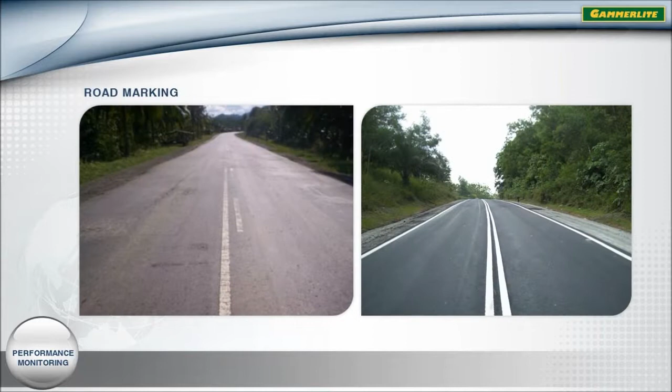The performance monitoring process in a sustainable road asset management involves measurement of specific indicators to identify the current level of service of assets and its capability. If a deficiency in level of service is recognized compared with the desirable level of service, interventions would be required to bridge the gap. This process is predominantly applicable to road assets, for example, road pavement, traffic signage, and road marking. These assets have lifespan and are subject to deterioration due to aging, traffic loading, climatic and environmental factors.

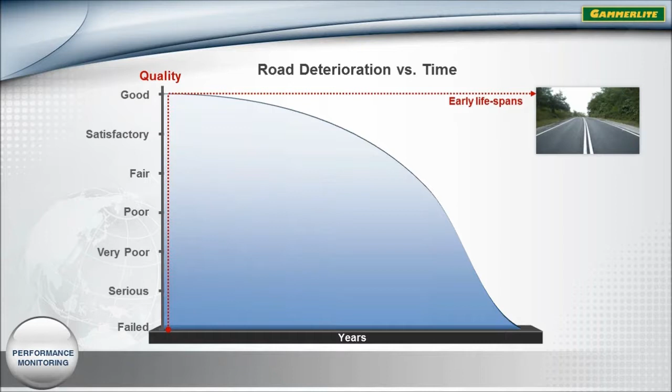Road pavement is one of the examples of road asset which will deteriorate in time under traffic loading and climate. One of the most common pavement condition indicators perceivable by road users is known as roughness, expressed in the International Roughness Index, IRI. New constructed asphalt pavement generally gives low IRI values, which indicate a good riding quality. However, as aging process continues and under change in traffic conditions, the roughness of the pavement increases, reflecting a decline in riding quality.

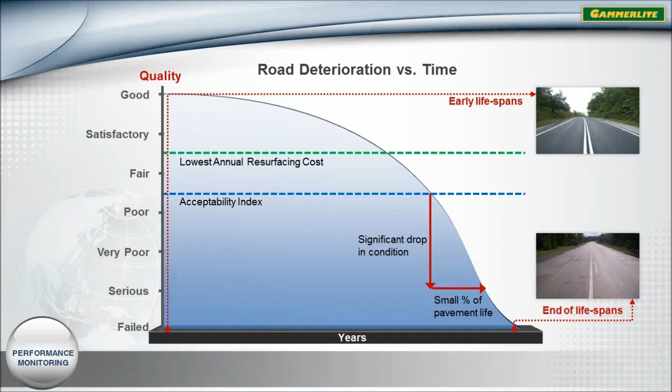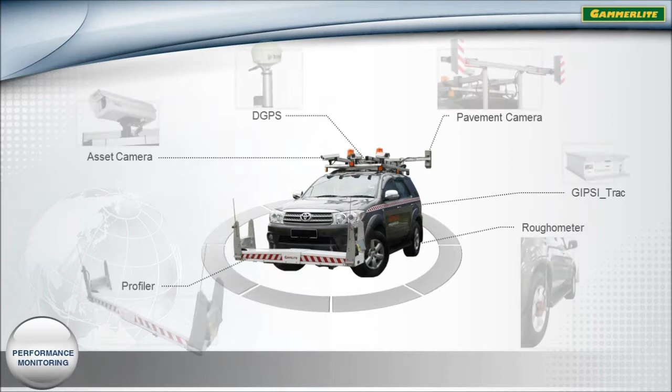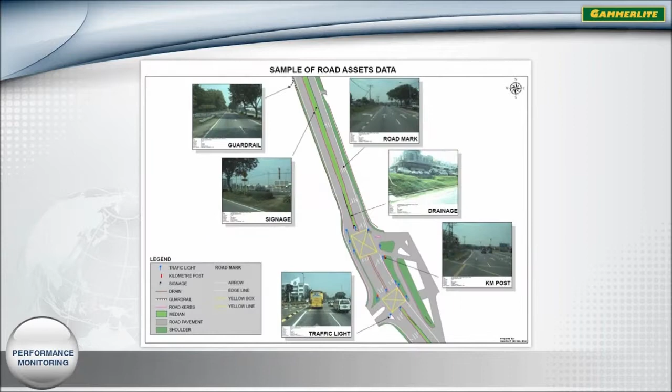As a complement to level of service, it is crucial that the asset performance and capabilities are assessed accurately to deliver the desirable requirements. These measurements are achievable by using specialized equipment to measure current performance of assets. The Network Survey Vehicle is a state-of-the-art equipment invented for network and project-level survey. It is a high-speed semi-automated vehicle equipped with digital laser profiling system, digital imaging system, road geometry and mapping system, capable of carrying out pavement surface condition assessment and GIS mapping.

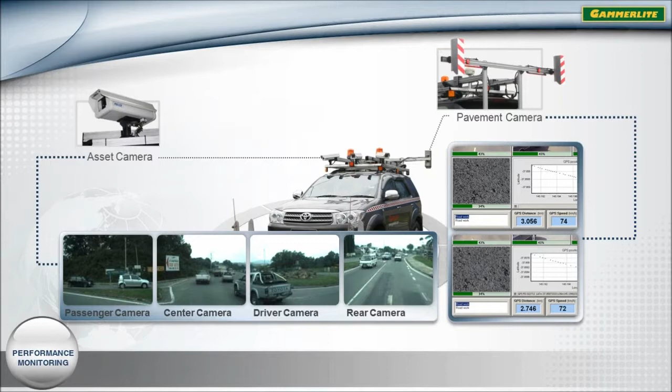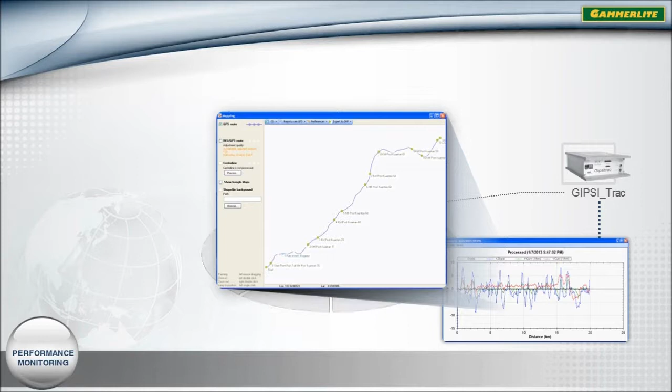The digital laser profiler is capable of capturing pavement surface profile data, such as roughness, rut depth, texture, and other indices. Mounted on the rack of the survey vehicle are digital asset cameras, precisely positioned to capture asset view and pavement surface distress. The vehicle also contains GIPSI_Trac Geometry device, which gives road geometry data for generation of road mapping.

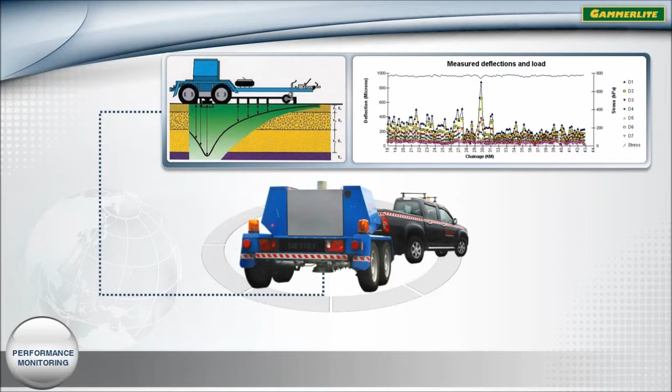The Falling Weight Deflectometer, FWD, is another essential equipment used to carry out non-destructive tests to assess pavement strength adequacy. On road safety aspect, the grip tester is a continuous friction measurement equipment used to evaluate skid resistance of pavements. Other handier device used for testing localized skid resistance is the British pendulum tester.

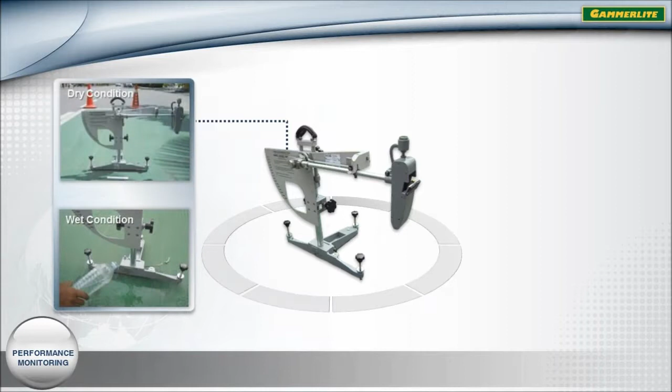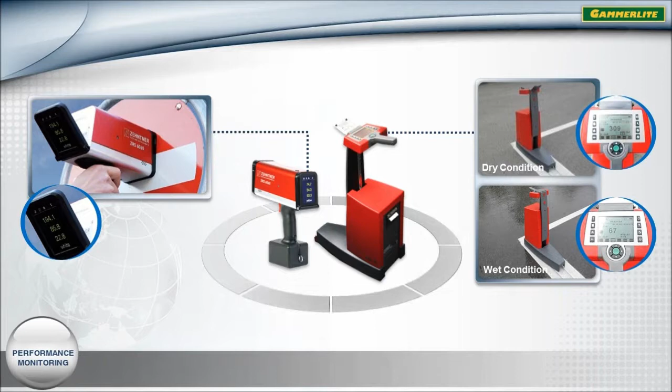Retroreflectivity of traffic signage and road marking are measured by the retroreflectometers, whereas road marking thickness is verified by the digital marking gauge. These data are then analyzed to identify the most appropriate solution, in a timely manner, to close the gap between the current and desirable level of service.

The processing tools which utilize these data are the Road Asset Management System, Pavement Management System, Life Cycle Cost Analysis Tool, and other modeling tools. One of the greatest benefits provided by these tools is to forecast future intervention needs to meet the long-term level of service within the available resources.

In a typical pavement asset management system, the system database contains pavement inventory, condition, structure, traffic, and work history data. These data can be imported to a decision support tool to perform strategy, program, or project analysis. The output is the establishment of policies, optimized multi-year works program, funding requirements, and network performance predictions.

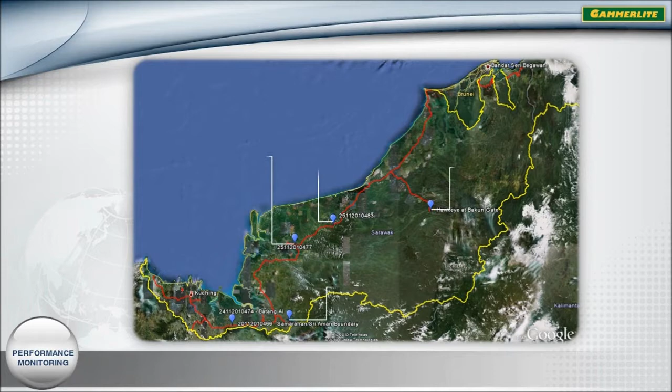Gammerlite Group has excellent achievement in providing the performance monitoring service to our valued customers. One of the major successful services we have provided to the Ministry of Works Malaysia involves data collection for digital road data sets and other related features. We have also supplied performance verification, in supplying traffic signs and road markings for road authorities to ensure standard and specification compliance and to provide justification for renewal scheme.

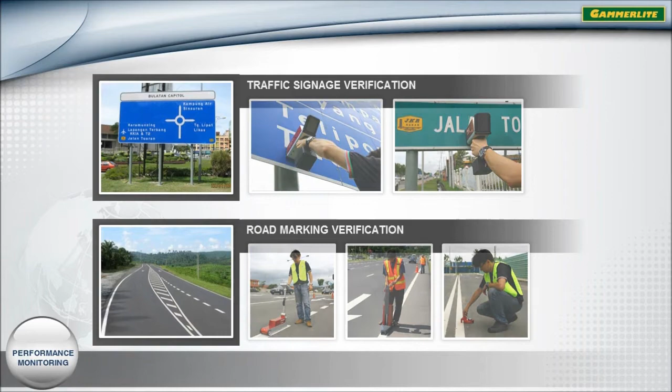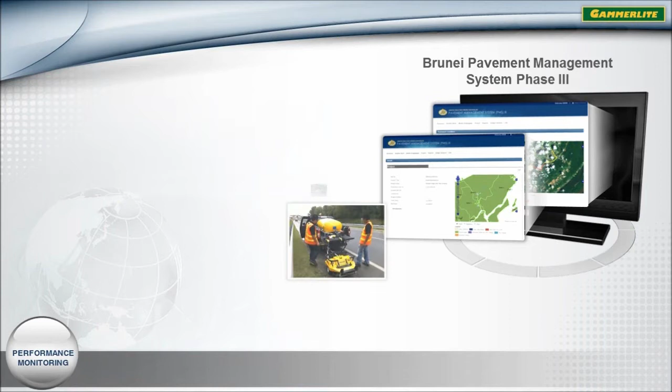The Brunei Pavement Management System is a project involving the upgrade of previous system with improved functionalities and extensive pavement condition surveys on the road network. These surveys were carried out by our specialized and advanced equipment, the Network Survey Vehicle, FWD, and Grip Tester.

Upon verification of the most effective solution to raise the current level of service, the performance monitoring then leads to the design and planning stage in the overall sustainable road asset management cycle, where options and candidate assets for treatment or rejuvenation are investigated in greater detail prior to actual implementation.